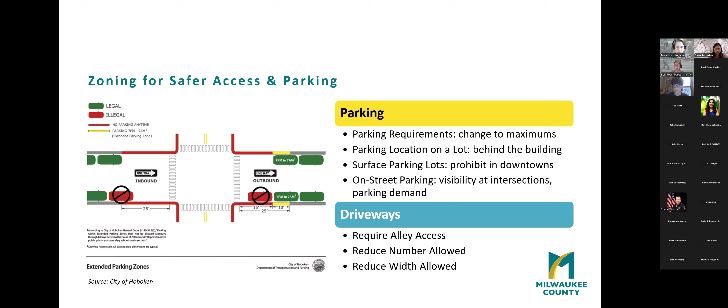Hello, everyone. My name is Nate Young, and I am a professional engineer in the Minneapolis office here at Toole Design. I specialize in complete streets, bikeway design, and safe routes to school. And my goal in everything that I do is to create people-centric places that people enjoy as they move from destination to destination in their daily lives. Today, I'll be talking briefly about public space programming and demonstration projects, starting with public space programming.

Next. Physical design of a space can create an excellent blank canvas for people to interact with and foster a sense of community. However, a certain spark is required to activate those spaces into places that people want to exist in. While some spaces naturally lend themselves to becoming places, such as parks, playgrounds, and other active locations such as that, much of our existing infrastructure is centered around the automobile instead of people. Various tactics exist to activate these spaces.

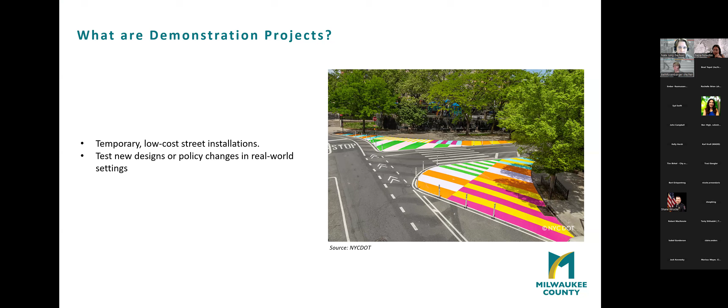Next slide. Demonstration projects typically use materials that are quick and easy to deploy. They don't require a roadway rebuild or repaving, and they can typically be done with city staff. An example is these modular speed cushions, as shown at the left, which allow wider wheelbase vehicles, such as fire trucks, to cut through without deflection, while most vehicles must traverse the actual hump of the cushions. Note that these are a rubberized plastic material that simply bolts down to the pavement and can be installed in a matter of an hour or less with little to no engineering required and only using city staff. Next slide.

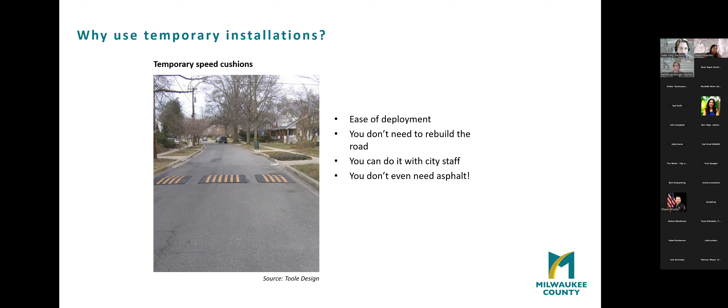Demonstration projects can also be used to iterate on a design, such as this example in Bloomington, Indiana, where a neighborhood greenway was enhanced with quick build materials, including bump outs, speed cushions, and temporary paint. At first, the residents were unsure of whether or not these enhancements were necessary, and after years of being installed, the community was simply sick of it. Sick of the look of it, that is. They loved the safety benefit and were clamoring for a permanent, beautiful installation. The city came in afterwards and reinstalled the materials with permanent installations, such as installing bump out chicanes as curved native planters, as seen in the bottom left photo. Next slide.

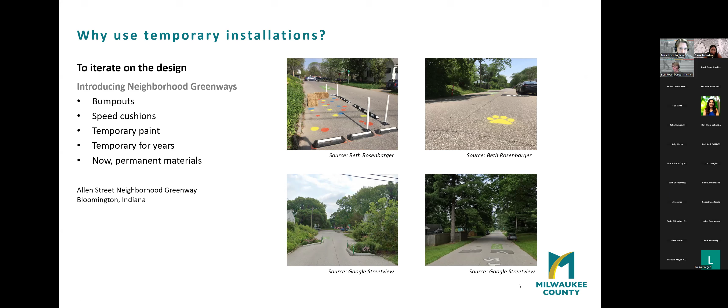Demonstration projects can also use modular materials, like in this floating bus stop, which allows the bikeway to ramp up, creating a level platform for pedestrians and enhancing accessibility for blind and otherwise disabled users. A benefit of modular materials is that they can be reused. So when the design is transformed into a permanent solution, or if it's decided that it is not in the best place for the design, they can be removed, stored, and reinstalled at a different location.

Another sometimes overlooked benefit of utilizing modular systems is that they can be deployed in construction sites. For example, if a buffered bike lane is installed on the street, a floating bus stop can be installed with a modular system in a different location on the block while the permanent bus stop is being renovated. Next slide.

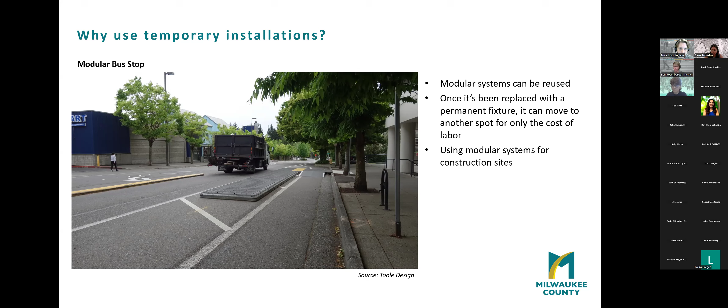Finally, demonstration projects are an opportunity to get people not typically involved with construction projects to pitch in on their own communities. This can be something like letting the community decorate roundabouts and traffic circles, or by having a neighborhood activity to paint crosswalks, bump outs, or other street art. Next slide.

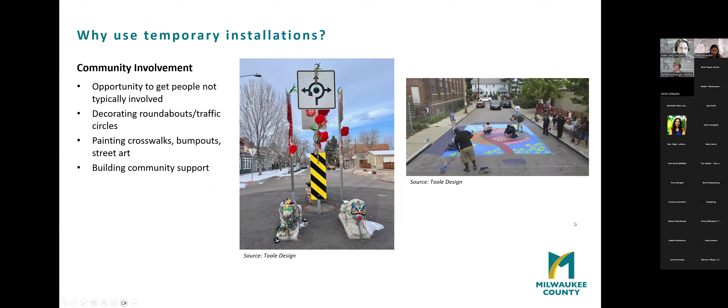And now we'll get started with our panel discussion, which will be a few short presentations followed up with a Q&A.

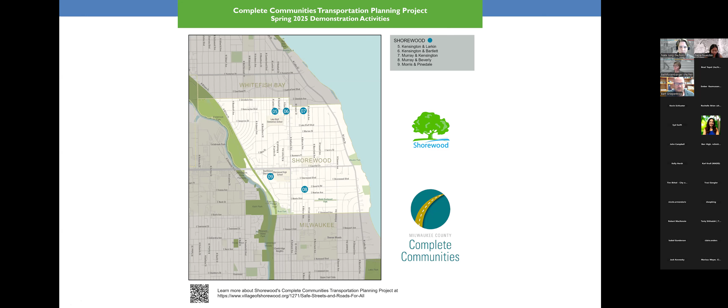Numbers 5 and 6, up in the northwest quadrant near Lake Bluff Elementary School, are where we installed the curb extensions. And then 7 and 8 on the east side of the village, that is Murray Avenue, which has been identified as a neighborhood greenway, formerly Bike Boulevard, for people not wanting to travel on Oakland Avenue. They can use North Murray Avenue as a less busy street. So, next slide.

As all projects start in Shorewood, we had to get an identified communication plan presented to the village board. This just kind of set expectations and helped manage the process. We used pretty typical standard channels of communication, including our project website and a news flash within our village website. We did neighborhood notices to anyone who lived within 250 feet of an installation, just to give them a heads up and invite comments prior to the installation, to make sure that we weren't missing anything.

We also did relatively regular updates through our village manager's memo, which has 3,200 subscribers. So we get a lot of good coverage on that. We also installed a display board at the village library, which has a lot of walk-in traffic. And so we kind of laid the groundwork for communicating what the purpose of this program was, and managing expectations.

We also did social media posts throughout the project, and we will be doing an article in our Shorewood Today magazine, which goes to all addresses, kind of as a finalized report, or a what we learned kind of thing, coming out this fall or winter. Within the demonstration activities, we also did an online survey to allow people to submit their comments. The survey generally related to whether or not people thought the installations were effective, and whether or not they had comments on the installations themselves.

We received 541 responses, which was pretty high. In comparison to, say, a planning effort to update the bike ped plan, putting something in the ground or on the street really does get people to provide comments on it. So it was a quite successful survey that we then indexed to get common themes from each of the installations. Next slide.

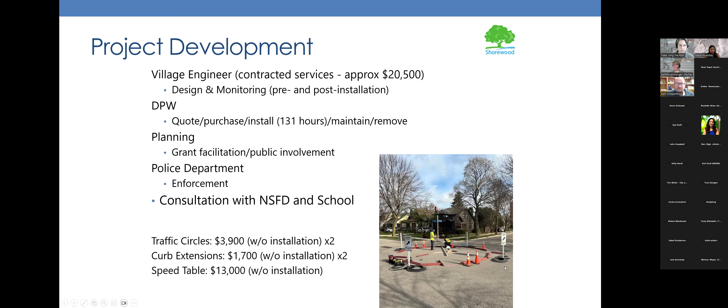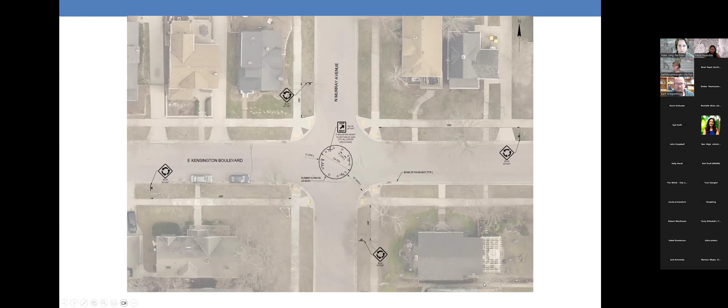Next slide. This just kind of shows what the final results are. So rubberized curb, cones, signage, things of that nature. So once again, in the middle of the intersection, this is an intersection where actually 2 neighborhood greenways are projected to intersect. So this is a highly desired intersection for understanding how demonstration activities or traffic calming could work.

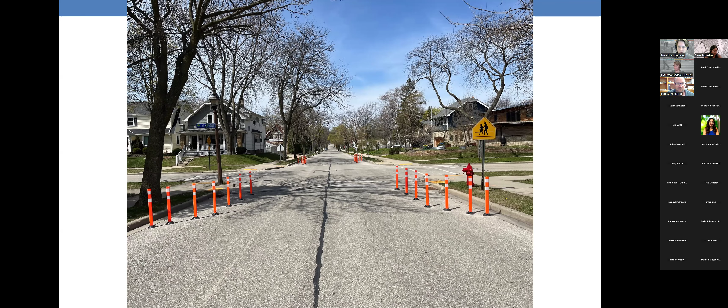So this took a lot of work to install. I think there might be thousands of bolts that it took to get that down there. And there is some concern by DPW of what the roadway will look like when it gets removed. So things to keep in mind, but it's been very stable. There's been no maintenance requirements or issues in any of our installations. So we're happy with that as well.

Next slide. This is just the public feedback we received. So as I mentioned, we did a survey when the projects were installed. All of them sought to see whether or not people thought they were effective. Traffic circles, 56% of people thought they were effective. That's higher than those who didn't, because we had a lot of people that said they weren't comfortable responding to that. But 56% was quite high.

But that being said, the comments also allowed people to submit any issues they had with them. So when we compiled them into general themes, there was some discussion of confusion with traffic control and enforcement. Once we installed them, people started using them perhaps as roundabouts and ignoring stop signs and yield signs that were previously in place and kept in place. And so just being able to communicate to people that traffic control still needs to be followed, and review with our engineer to make sure that traffic control was installed properly.

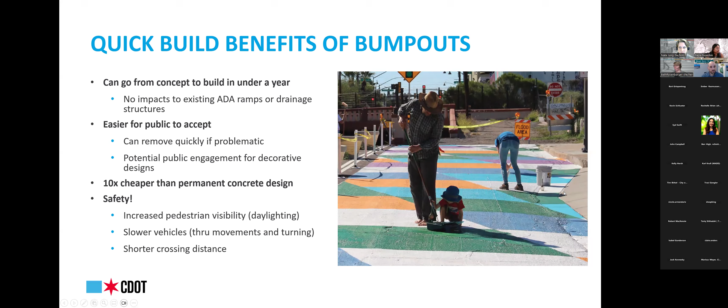So where do you start? How do you actually figure out where to put these? In Chicago, we've been doing them for about 15-ish years, since around when I started here. It took us a few years to really get a process in place, but they are now a standardized thing seen in a lot of places. And so now we get a lot of requests because there's a high level of comfort with our council members and with the public, who work through the council members to request locations.

Anytime we're doing capital work, resurfacing projects, or other types of corridor work, we will generally try to include bump outs or curb extensions of some kind, either a paint and post quick build option if there's funding or drainage issues, or we'll strive to do the more permanent concrete, which is more expensive and more challenging to design.

And then we also specifically target locations throughout the city, based on a citywide safety and equity analysis that we use to guide us in a specific direction and highlight certain communities or specifically school areas, where we'll do a lot of locations in a denser, maybe 4x4 block radius. We'll actually do 10 or 12 locations in that area to change the neighborhood dynamic and feel of that place.

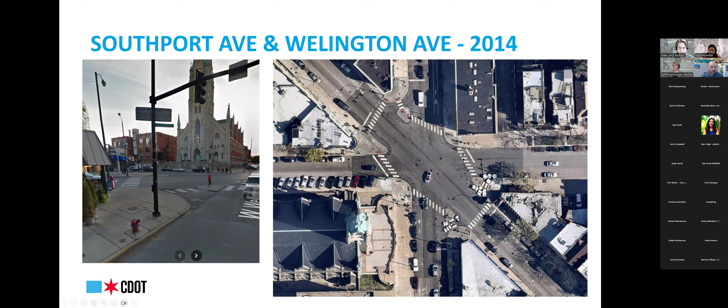Actually in this slide, I'm realizing now you can already start to see shadows of the posts out there that are starting to outline our bump out. So this is right as construction is starting, but you can still see the original layout of the intersection. Next slide, please. Here is after we installed.

So we went with a decorative design out here. This was working with the community, and I think we also hired an artist to help us design and implement, with a lot of community engagement because it was such a big change. But again, just paint. This is just typical materials, paint and post. We're using typical pavement marking materials for those edge lines.

I think the colorization, the blue and green, is not even a traffic rated paint because you're not having vehicles drive over that. So maybe it's an even cheaper material when you paint something inside. But again, we're getting rid of all those slip lanes and just tightening up that intersection, shortening those crossing distances. Let's go to the next slide, please.

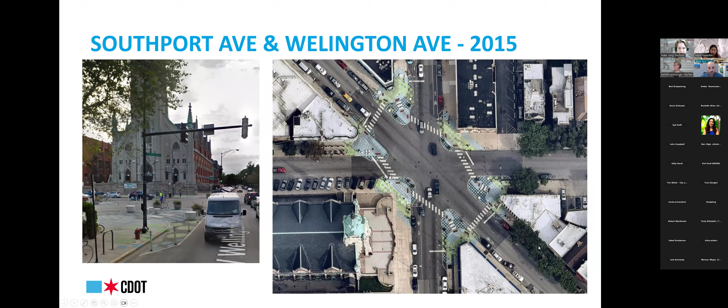So that was 2015, and then 2022. So 6 to 7 years later, we knew that some capital improvements were going to eventually make their way here; they were already in initial planning, and funding had started to be set aside when we did the polka dot pattern. As that paint wore away, we started having more maintenance issues where those posts fall down over time and get banged up. We knew more capital work was going to come through eventually.

And so this is the permanent design that we see out there today, still maintaining some of that fun circle polka dot material, which was designed intentionally to break up the space and make it feel a little more playful. Next slide, please.

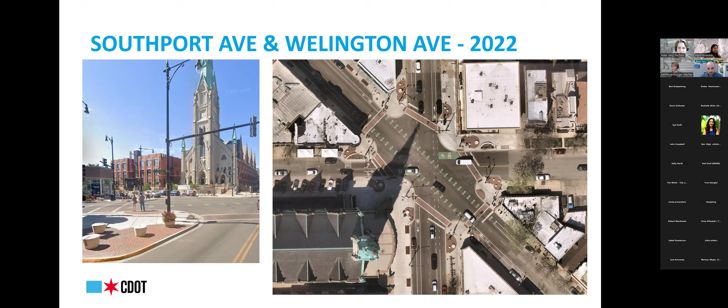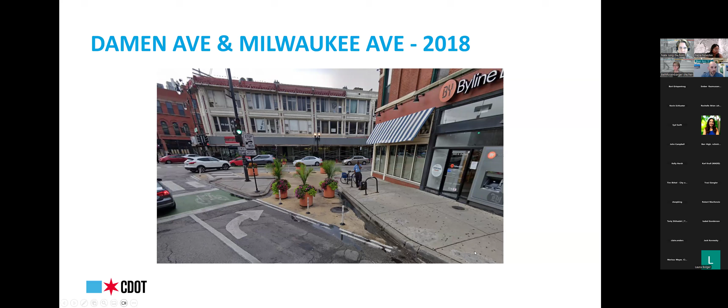Another example of a 6-legged intersection where we focused on a specific slip lane here. Next slide, please. So we came through and added striping. The tan is that methyl methacrylate (MMA) pavement marking. In this case, we also worked with the local business association and they supplied and maintained the planters there. So they were the ones funding the landscaping company to come out and make sure it was getting watered and planted and it always looked nice. So it kind of added that extra pop to this.

Next slide, please. And then coming through 5 years after that, with a permanent concrete design there. The planters got shifted to the other side of the street, but you could do more with this space. You could add a cafe space there, or you could do some activations. I've actually seen bands play on this corner where they just bring an amp and play live music in the community, which is kind of fun. So it just gives you that extra space and flexibility to do stuff with.

But it's all this kind of progression: as you get in initial improvements, always be keeping an eye on the capital projects, water main work, resurfacing work that are going to be happening in the far future, because you can have all those community conversations and discussions with businesses now with an easier to implement treatment. And then when capital work or higher dollar projects come through, you alert them, you tell them about it, but it's not a bigger discussion anymore. It's already accepted that this space is a pedestrian space and it's easier to implement these types of designs.

Next slide, please. And I just wanted to show another flavor we use in Chicago where we want to build concrete, but drainage is really problematic, or building ADA ramps. We have maybe a little more money or we want a bigger impact than paint and post. We do this treatment, we call it detached concrete bump outs, because you still have a gutter channel there. We do this a lot around schools.

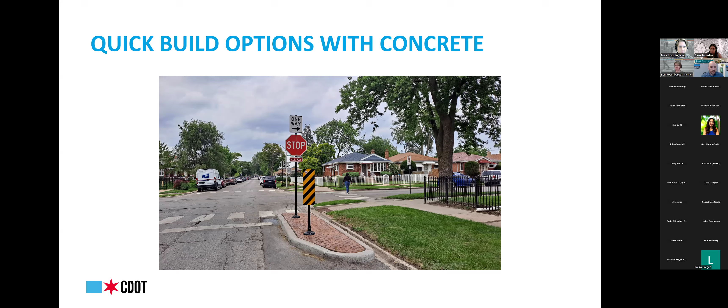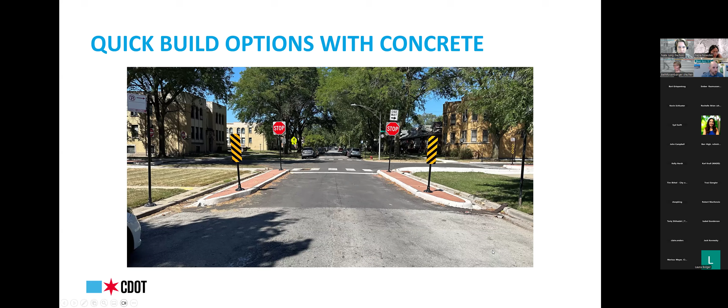Slide, please. And another example, because we have so many one-ways in the city of Chicago, here's another flavor of how we'll do it on both sides of the street normally. And even if it was a two-way, we would still do a design very similar to this. But we like to focus them on the approaches as people are coming to a stop to further increase that stop control. Next slide, please.

And here's another example where we worked with a neighborhood association who really wanted to do some sort of beautification. So we just put in the curb and added the dirt, and they came in and maintained their own plantings. It's hard to tell on the slide, but they're actually on both sides of the street. Here's plantings on the left side as well. And so that was their choice to beautify the intersection. We have a very simple maintenance agreement that we sign with those neighborhood groups just to make sure that they maintain things over time. But again, another flavor of an option.

Go ahead, please keep going.

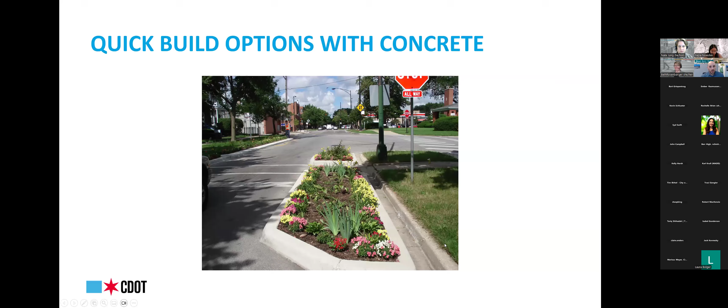Next slide. So I want to talk about costs, at least what it costs for us in the city of Chicago. Our paint and post curb extension can be $2K to $5K.

It's about $2,000 if you don't do that colorization on the interior, and that's about $5,000 if you do some sort of MMA or thermoplastic marking in there. If we do a fully attached concrete design, that can be up to $50,000, depending on drainage and things. A lot of times we do have to shift some drainage structures around. We try not to if we don't have to, but it happens every now and then. So that can be even higher than $50K, depending on how that works out.

And then the detached example I showed was about $12K. So we can typically get about 10 paint and post bump outs for a permanent one, and maybe 4 detached for a permanent one. So we're still trying to stretch our dollars all the time with many of our projects. I will say that we as the Complete Streets Group rarely actually pay for and build our own permanent bump outs. We use our other capital projects in the city to mainly fund those. Next slide, please.

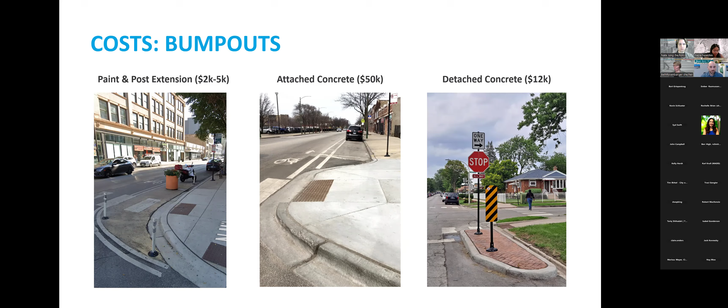But the whole point is to get some stuff on the ground. Usually you're going to base those off of some sort of safety concern, that prioritization we talked about. You're going to get a mixed public opinion, kind of like what Bart was getting at. You can do public surveys, and obviously the people who respond or call to complain, critique, or compliment are always going to be the most outspoken people in a community. There's always a huge percentage of people that just don't comment or reach out. But you can get mixed reviews.

But as you expand those locations, you can always point back to those initial locations and say, look, these are great. They're a benefit, or at the very worst, they're not inhibiting anything. Fire trucks can still use them. It's not inhibiting movements, it's just encouraging slower speeds and safer behaviors. You also have opportunities to engage the public and make them part of the process. And as you get more and more locations, the public gets a lot more comfortable. They're less questioning. They just start to expect these.

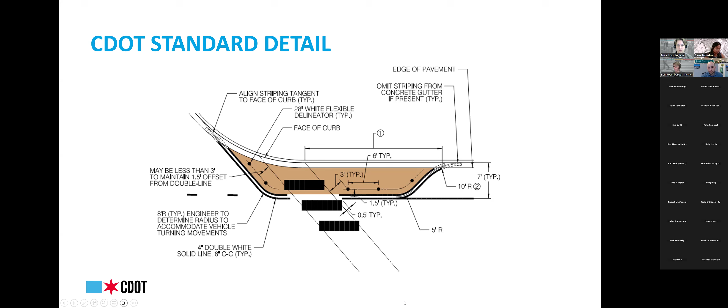You may have neighborhood streets that are typically the same width, or intersections that are very similar, or crossings that are very similar along a corridor. And maybe you can just take a standard detail that you've worked on and just kind of plug and play that in a lot of locations. So that may be a good tactic for communities where it's difficult to get engineering staff for these kinds of projects. Next slide, please.

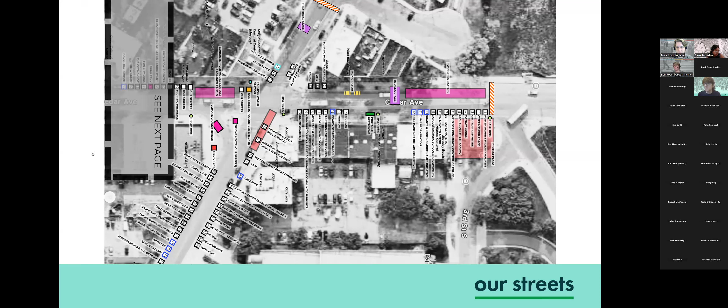This is probably something that y'all experience: sometimes when you do pedestrian friendly improvements, you might have to lose a parking space or two, and people are going to be like, oh, that's going to lose this business. And it's like, well, no, actually a lot of folks are walking, they're biking, they want to be present on your street, they want to be playing and sitting and having a coffee. And if you design streets for folks to be on, they come there. I think open streets can be a great example of how that can work, that if you build it, they will come model. Next slide.